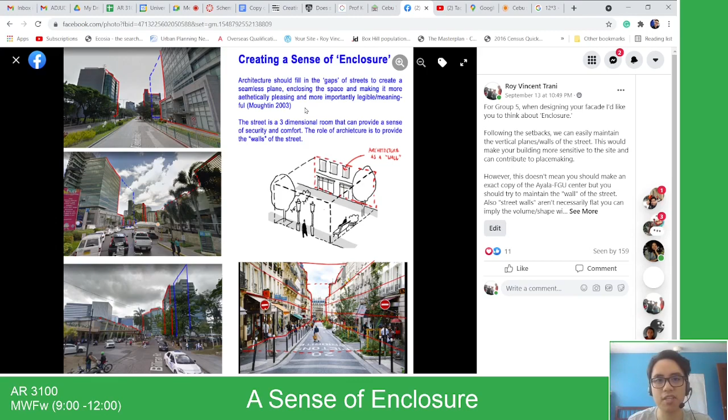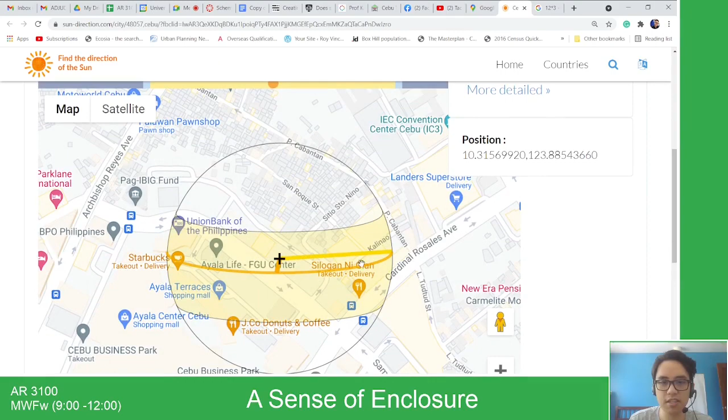So architecture should fill in the gaps of streets to create a seamless plane or aligned plane, enclosing the space and making it more aesthetically pleasing, as well as providing other functional requirements like shading, which we talked about. And just very quickly, imagine if your building is here. This is September, this is today. The sun will be more or less on the southern side of the site.

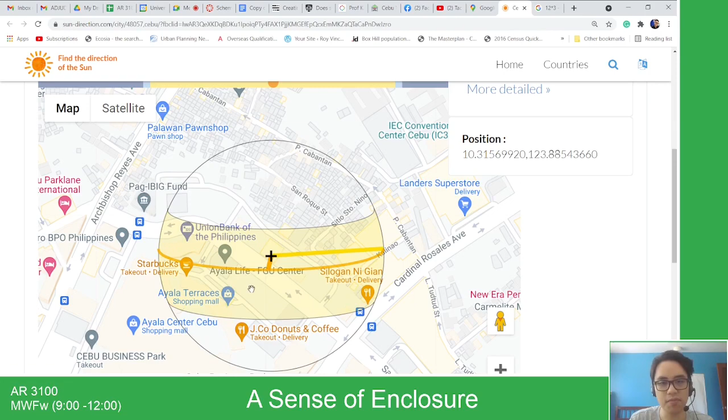This is Ayala FGU Center, this yellow square over here. I think this is a bit more this way, like that. Our site will be where this yellow square is, and that is Terraces over there. Let me zoom out a bit because it's causing me problems. Sunrise starts at like 5:30 a.m.

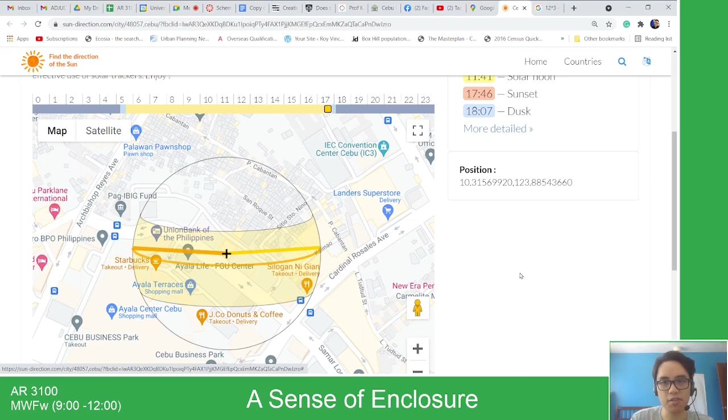And then it moves along this path over here to the southern side, because that's the sun path diagram for September 2021. By 12 o'clock, the sun is somewhere here, like southwest, during noon, and then it continues until 5 p.m. So that's what it looks like. And remember, I mentioned that northwest is the hottest part.

That's because May is one of our hottest months in the Philippines and in Cebu. Let's say middle of May, May 15. The sun path in the afternoon, from 12 onwards, is situated northwest of any site in Cebu City. So that's why I say that the hottest part of your site is northwest.

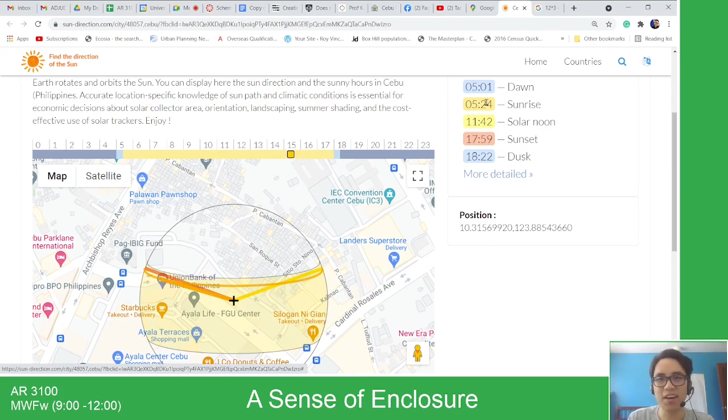So you can see 12, it's northwestern all the way to 5 p.m. So that's why I say northwest is the hottest part. Now, how will that impact your sense of enclosure? Over here, we had a couple of samples. Let's say your massing looks like this, where you have a terrace setup facing the open park, and this is FGU Center here, and this is Ayala Mall here, the simple rectangle. So how is sense of enclosure achieved by this design?

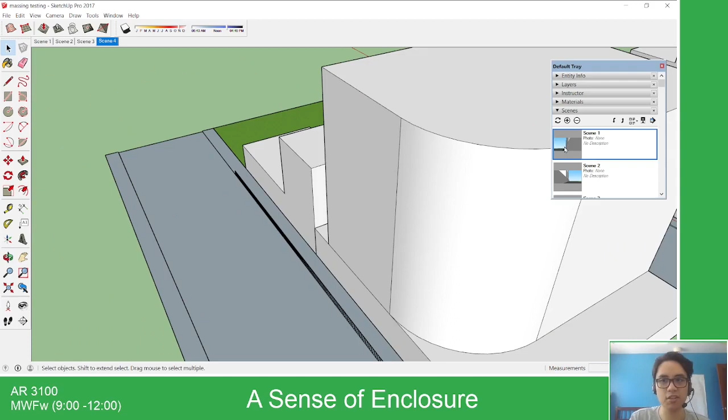If we go to street level, we're in Mindanao Avenue, standing on the eastern side, looking west, and you can see with this design, the sense of enclosure, I think, is successfully achieved. The most important part we noticed during this morning's discussion is to have a tall mass, sort of mirroring FGU Center, closer to FGU Center.

You can have your building set back on the eastern side. It doesn't really affect the sense of enclosure as much. And most importantly, the ground level and second level should be more or less aligned with FGU Center as well. So this is for the terrace design. And then let's look at it from the east looking west.

Still looking pretty good. The reason why I'm not too bothered with this gap here is because there's already an open park here on the eastern side. It kind of continues. There's this sense of continuity if there's no building mass on the eastern side. But on the western side, it's more important because you have FGU Center. Now let's look at the Ayala side.

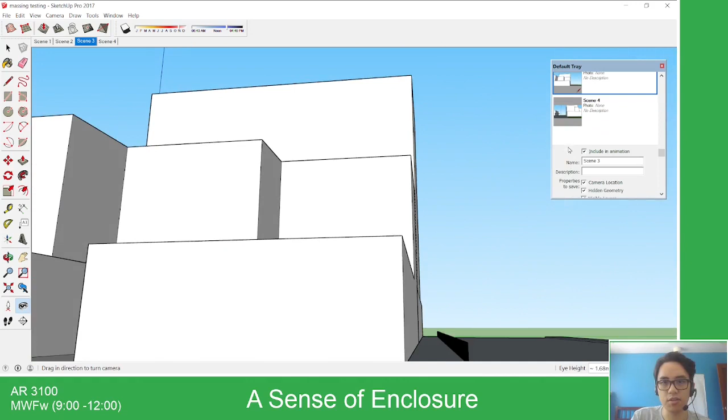Oh, here. So looking at the Ayala side, again, because of the open park on the eastern portion of your site, the sense of enclosure is still very strong, as long as you maintain that alignment with FGU Center. So that's what it will look like.

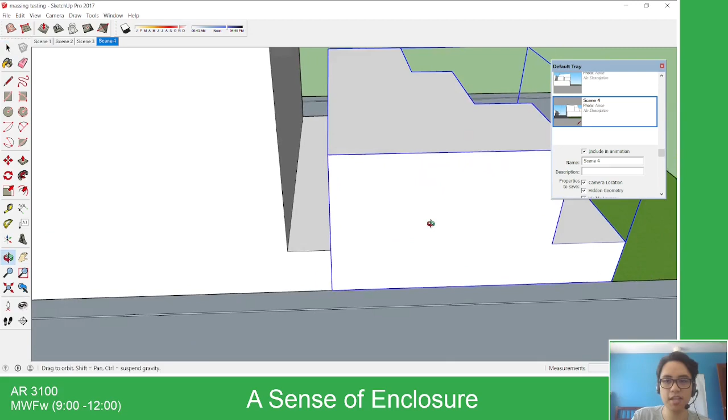Going back over here on the western side looking east, it still looks pretty good. This sort of massing doesn't have any setbacks on the FGU side, but it does have setbacks on the open park side. So let's try another building shape. Let's try this one. What if you just have a simple setback on the northern and eastern sides? How will that look?

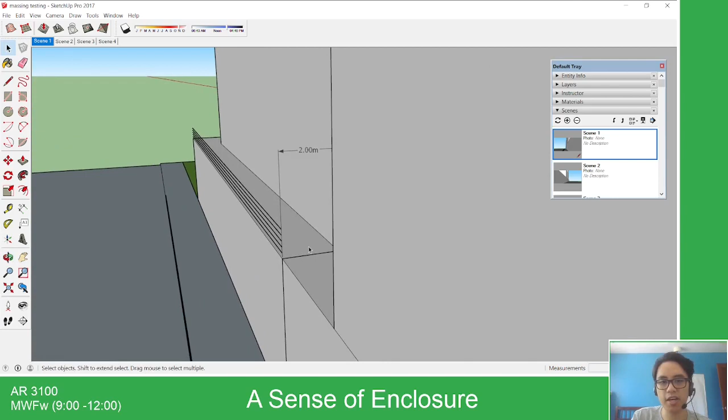So let's go to Mindanao Avenue. This one, especially at this angle, has a risk of not filling in that gap, even with a very small 2 meter wide setback here. You see that from this point of view, the alignment is not maintained, making this very weak in the context of an enclosure. So let's look at it from another side.

Yeah, it looks worse. So maybe a setback on Mindanao Avenue isn't really recommended. So either you build all the way up here, or you could add roof eaves to imply that massing. Let's say every 3 meters, 4x, like that, and then we create roof eaves. Let's say the roof eaves are about 0.2. Just multiply, copy paste that.

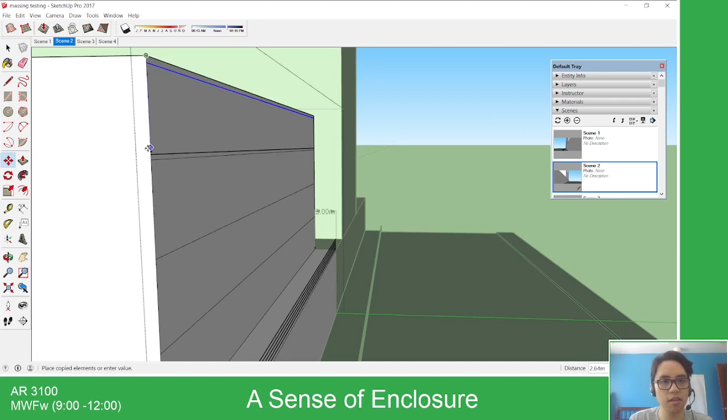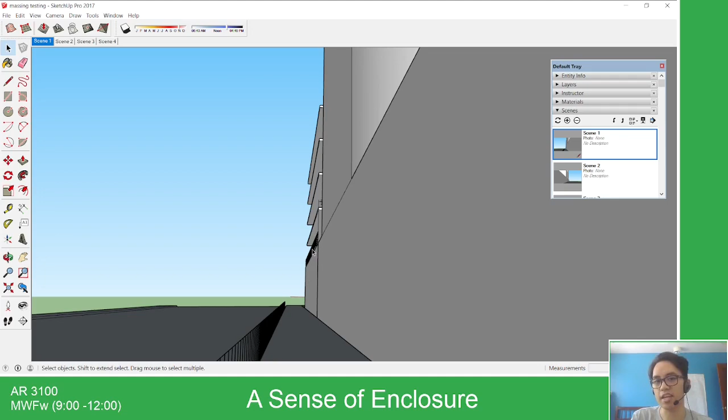Okay, copy pasting that, and then we'll push it out. We have roof eaves like that. And if we go back down to the street level, I think that helps a lot. Roof eaves are actually good for providing shading, especially on the northern side of your building, which is something that FGU Center lacks. I think this is a good way to provide shading and also maintain enclosure. So you can do this if your building setup is similar to this.

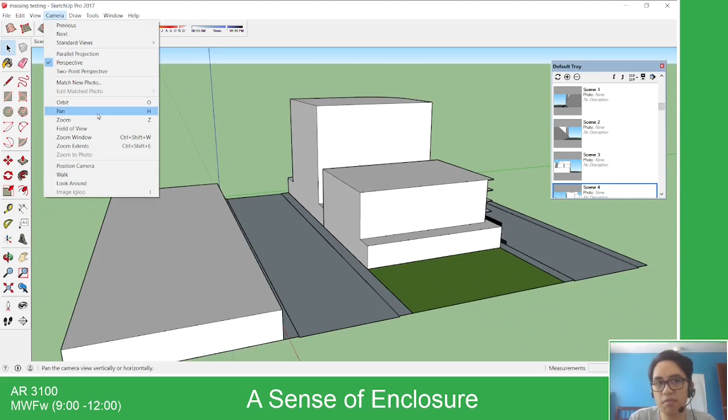Okay, let's look at the Ayala side. So again, if you maintain that continuous plane, it looks very good. And let's add our shading here. I think in your Revit, the location of the site is already built in, but for SketchUp, you need to plug it in. So let's see, model info, geolocation, add location. Oh no, set manual location is a lot faster.

Let's see, this is Philippines, Cebu City. And then to do this, if you're using SketchUp, I might as well show it. We just look at the coordinates for Cebu City. So you just copy that, including the north.

Okay, so how SketchUp formats it: the first few degrees, whether it's 2 or 3 decimal places, you just copy that exactly. You don't need to copy the degree sign. Actually, you can copy the degree sign, but you can even type it in without. So I'll just copy that very quickly. And notice Google SketchUp removed the degree sign, just added a 0 there. So if I click OK, it's already geolocated to the Philippines.

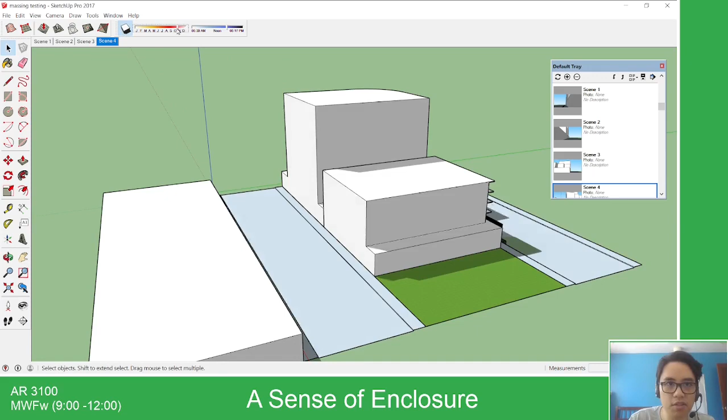That means the shadows and the sun diagram should be accurate to the Philippine location. So let me turn on shadows. This is for November. Let's go to September. Let's go to Mindanao Avenue. Let's say noon. What does the shade look like? Okay, let me update.

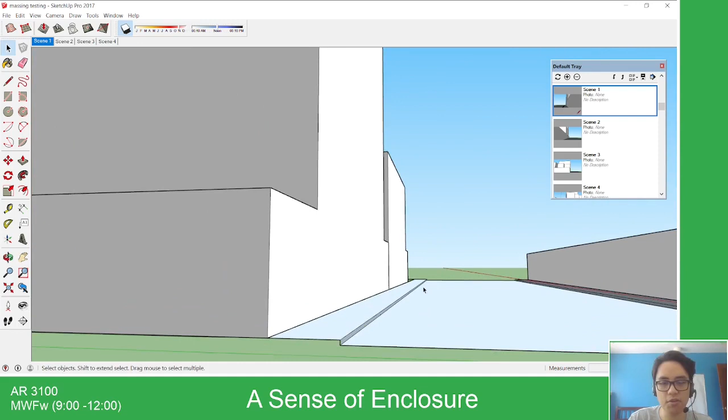So notice that because the 6-story building is aligned with FGU Center, this is the shade over here, where my mouse is, at 12 noon. So very much shaded. Even if you set back a lot, the shade I think is enough. There's almost 5 meters of shade during noontime on this side of the street. But what does it look like on Biliran Road? Because the sun is more on the southern side, it's really exposed to the sun. So you might want to add some roof eaves on this side as well.

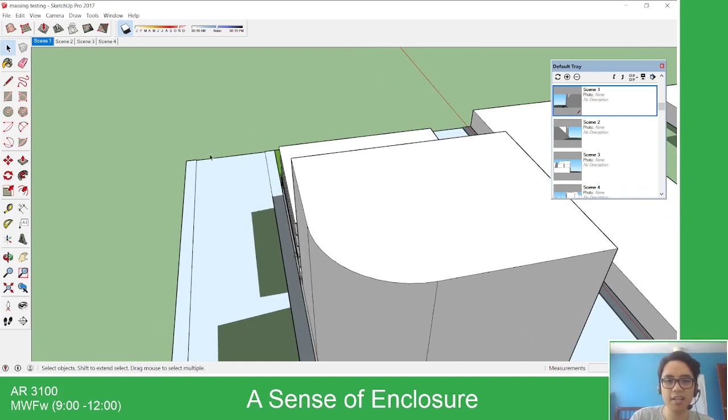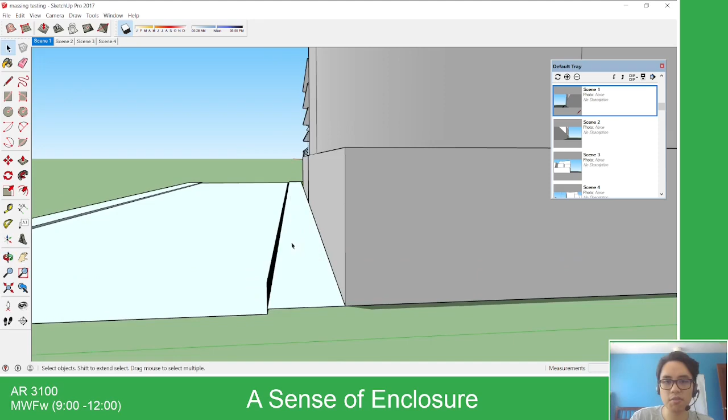So in general, for tropical climates, roof eaves should be all around the building because half the time the sun is on the southern side, that's why we have our shadows on the northern side, and the other half of the year it's on the opposite side. So let's see our summer months: March, April, May. Notice the eaves are providing a lot of shading for the interiors, and the street is a lot more exposed. There's really not much you can do about that. But at least for the other 6 months of the year in Cebu City, it's shaded.

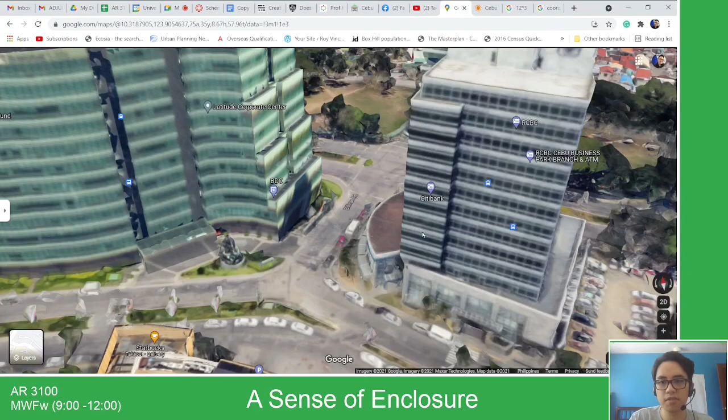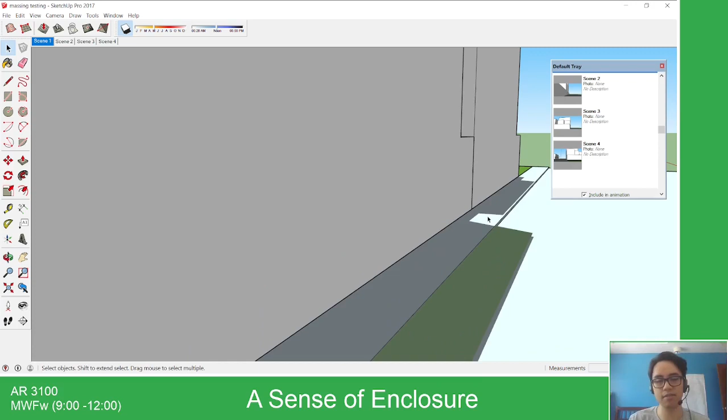So let's look at the Ayala side over here. Again, because we maintain that sense of enclosure, there's that shading provided, at least in front of your building. This is the existing setback from the FGU Center. If you look at Google Maps, the FGU Center sets back over here. Switch to 3D? There we go. So there's already a setback there. I don't know why they set back. There's a gap in the shading, so that makes it less comfortable, at least during the summer months.

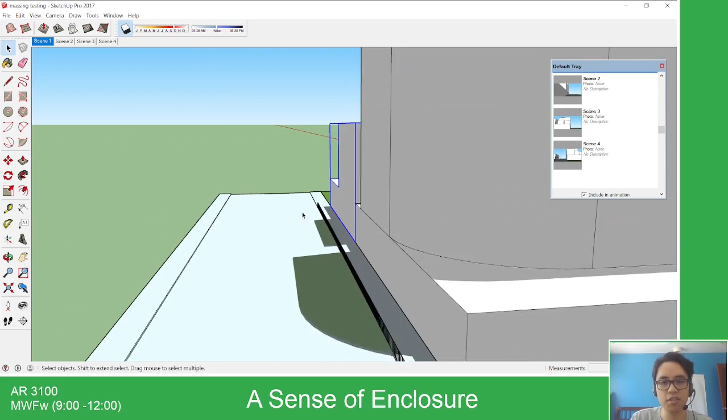So again, enclosure can provide not only aesthetic benefits but also functional benefits like shading and cooling of the street. And then we have another simpler massing here. Let me move it over here. During the summer months, it provides adequate shading. During the colder months, the Ber months, so I'll move it to September, you still get that shading over here. But because you set back here, there's a gap of shade over here.

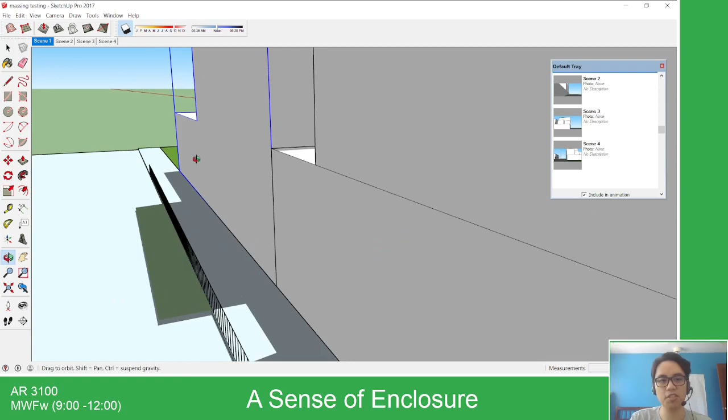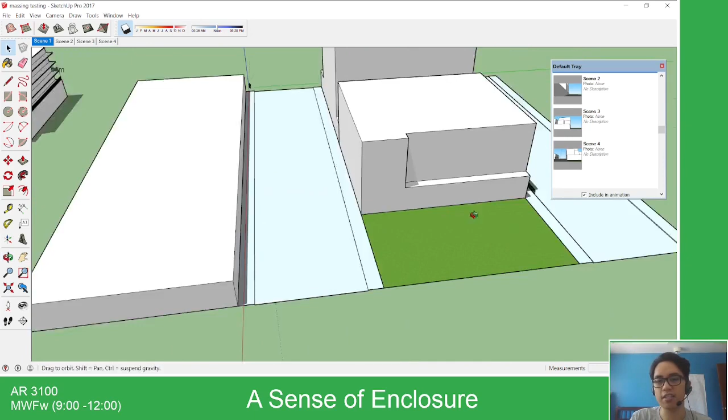So you might want to address that with, well, nothing really. There's nothing much you can do if your setback is here. You could provide some eaves here, but this is really the end of your property line, the maximum. So really, if you want continuous shading all around your building for all 12 months of the year, you want to maintain that sense of enclosure. If you reduce that setback there, during the Ber months you provide that shading. So you're making the street more comfortable, you're making your building more comfortable. The architecture is working together with the urban infrastructure.

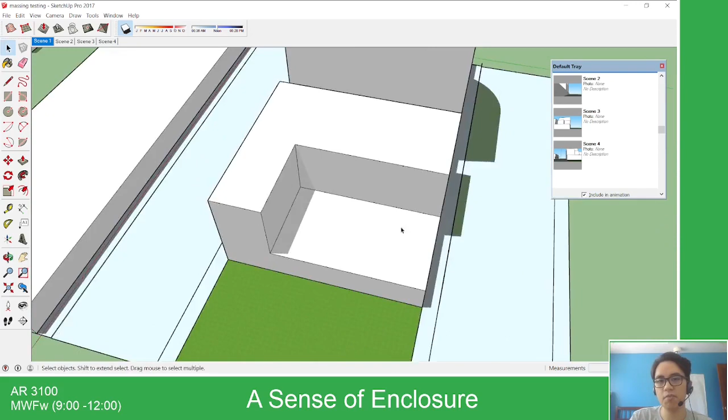So that is really what enclosure is all about: maintaining the visual quality of the street, maintaining the sense of alignment to existing buildings, and that just makes you a better designer because you're aware of the buildings around you. You're not designing in a silo, and your building not only benefits its users but also the people outside your building. So I think that just makes for good design.